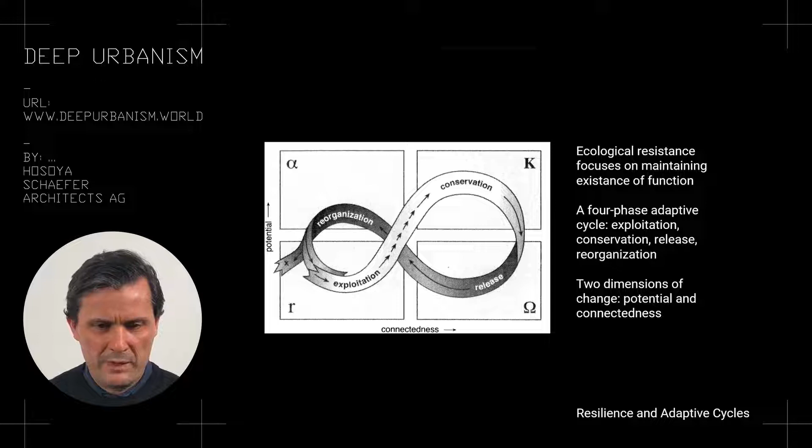again, becomes reorganized in informal ways, so we have a lot of value but not so much connectedness, and then a kind of a new cycle starts again. For me, this is extremely helpful to think about work also in this almost ecological sense. Specifically, when you then imagine that these types of adaptive cycles actually are nested into each other, both in space and in time.

So you have systems which oscillate very quickly, maybe in a daily cycle or in a yearly cycle, embedded in systems which oscillate slowly over hundreds of years, thousands of years. And you have systems on a local scale which are embedded in systems on increasingly larger scales. And they all affect each other.

So for example, it is interesting to imagine that you have systems which are changed by other systems on a smaller scale and a smaller time frame, what is called here revolt. But revolt also could mean planning. It just simply means that you affect a system on a certain scale in space and time with a faster system. So you could argue it's an actual revolution, but you could also argue it's, for example, a project team

working on a project, and with that fast and localized system affecting, for example, a part of a city, which is of course a slower and a bigger system, right? So it doesn't need to be a revolt in terms of revolution. It simply means smaller and faster scale affects a bigger and slower scale.

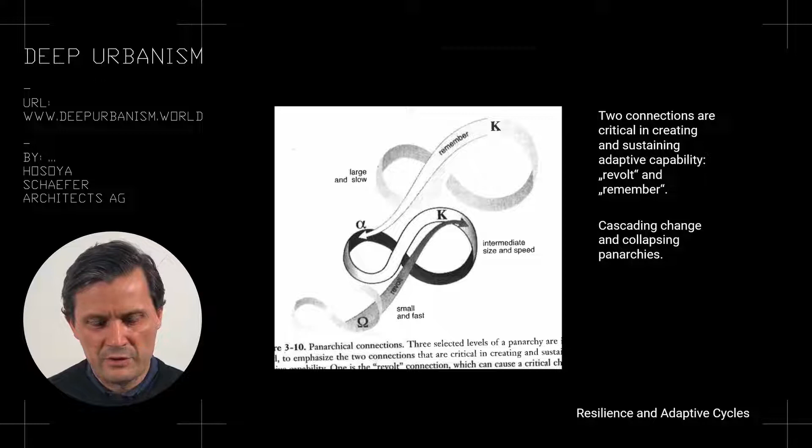But it might also be much easier things. It might be, for example, that a larger scale in a city, for example, infrastructure, is affecting the faster and smaller scale also in the city.

Then the other person which we met, which I find extremely interesting as a thought model, is Polanyi in terms of his idea of the great transformation. So the change from a local embedded culture to a more connected, but inevitably also more abstract culture at the moment when we invented market society. At the moment of scaling of industrialization. And here the term embedded is a kind of a key term for me.

So that means I think all of what we do as architects is kind of spanning between the connected and the embedded. So connected means we are linked to larger scales, also to faster speeds maybe, and at the same time we need to make sure that we don't lose embeddedness, or you could also call it you need to make sure that local life and global access are working hand in hand rather than against each other.

So when I talk about deep moves, what I mean is the idea to keep embeddedness as much as possible, so to keep the connection to the local, to the real, to the people in a particular place intact, with an idea of subsidiarity. So always try to solve on a local scale what you can and only go to a bigger scale when you have to.

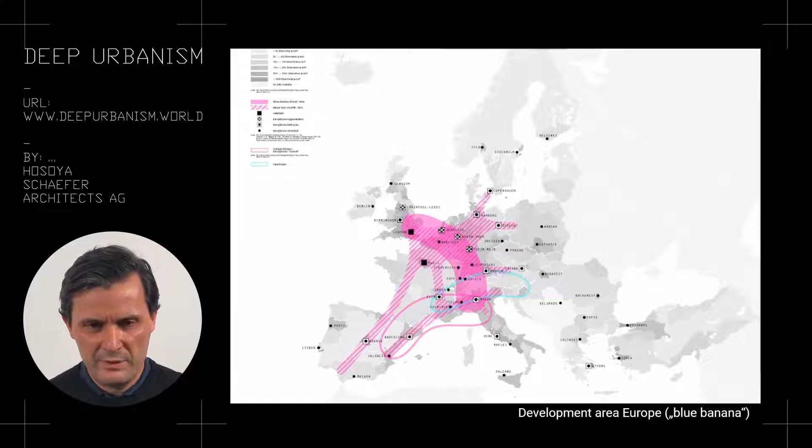And you need to understand both of these factors in order to understand Switzerland. So the very local embeddedness in these rolling green hills, and the connectedness to a kind of a European urban system acting with and into each other. The connectedness to the urban culture is of course important because it gives you also access to European markets, European economy, European culture, and so on.

And therefore, from the very beginning, the question was how these towns and villages and farms can link themselves with infrastructures to these larger systems, so from energy to mobility and so on. And very early on, people started investing in and building these infrastructures, for example, railroads. This particular railroad originally being built by private money because local industrialists wanted to have access to the Gotthard line, so to the north-south axis through Europe.

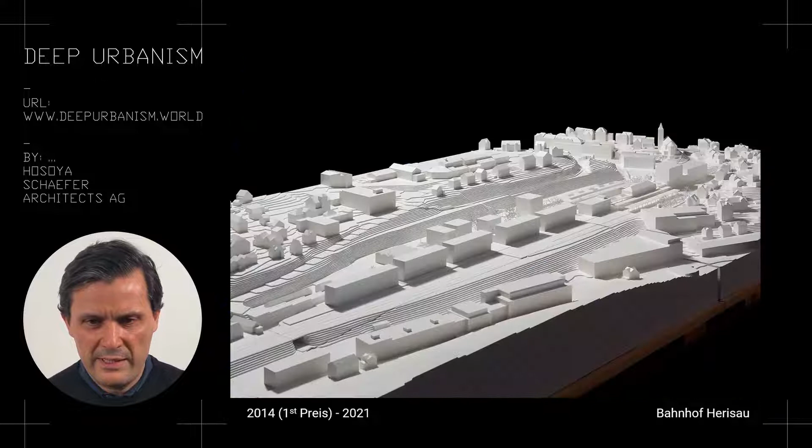So you have these little houses and this infrastructure right next to it. And this is a kind of a first project I want to quickly show you, which is the railroad station of Herisau, where we have the current state shown here in this overview, and here the future state we want to turn this place into, with a kind of a new station area here in the front, but also an area development where by reorganizing the actual station square and the bus stop and so on, we also generate opportunities to add additional buildings and therefore additional urban development on the site.

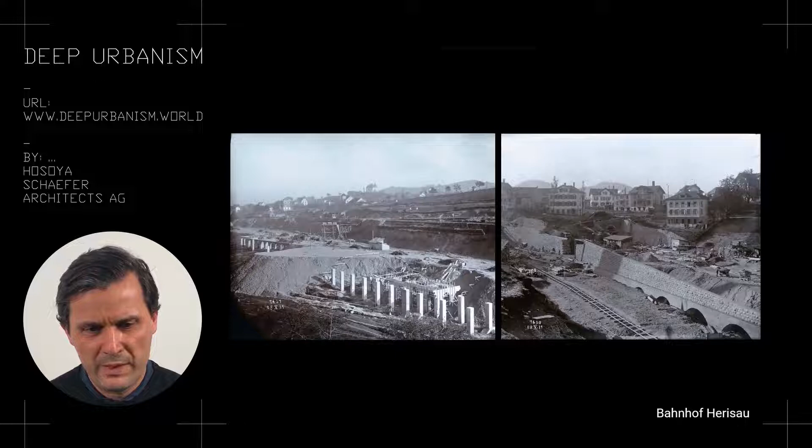But as I said earlier, for the industrialists, mostly invested in textile industry, it was very important to have the link to European markets. So they therefore were interested in having a railroad station which was a through station, which continued further on. And for this, they basically had to lower this track, this single track, add tracks and link through this station over the bridge which we have seen before, through a couple of tunnels to the main axis through Europe. An achievement which they were, of course, incredibly proud of.

So this is in 1910, the opening of this new station and of the tracks which now linked this town in eastern Switzerland to much bigger infrastructures and therefore much bigger markets. But now again, this infrastructure from 1910 has reached its limits, and bus stops have to be organized better.

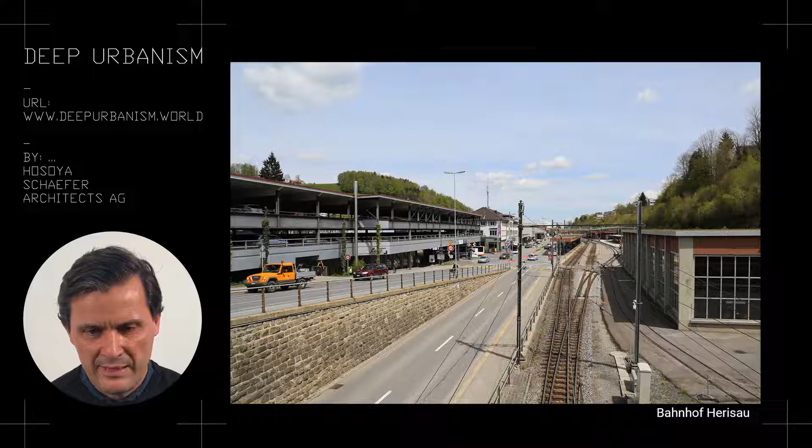The disability access has to be organized better. The entire logistical regime in the station doesn't work so well anymore. So the task was very much to turn this very nice, slightly sleepy station into something new. You see here a bit how it is organized between this cliff, which has been generated by this earlier generation, digging down and laying the tracks on this lower level, flattening out the hill, and therefore ending kind of abruptly before the valley then goes further down.

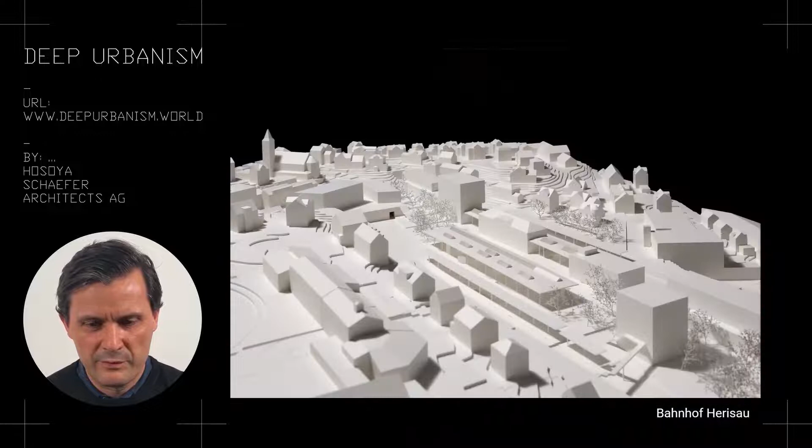This was our competition model from 2014, so quite a long time ago, where we proposed this kind of scheme. We have now developed this scheme further with landscape architects, structural engineers, civil engineers, signaletics and lighting designers into this concept of a kind of a concrete wood hybrid construction, which allows us to make very large spans and generate this much more open, much more clear organization.

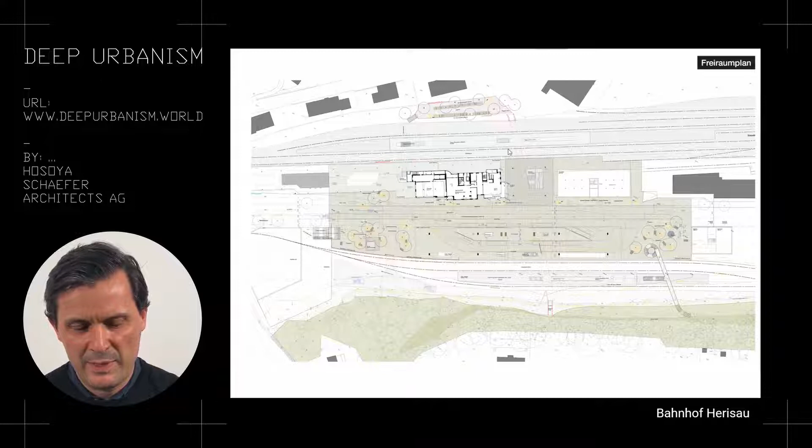Still referring to this old cliff, but organizing it more cleanly so that all the bus stops are now working around this central island, which gives us access to the trains, but also access to the bus, and most importantly links between the two train lines. So this is the train line which basically links the station to the larger system. This train line here is a more local train line. And here you see how this station now becomes reorganized, more clearly orientable and so on. And of course also generating a very strong sense of place with this very large roof.

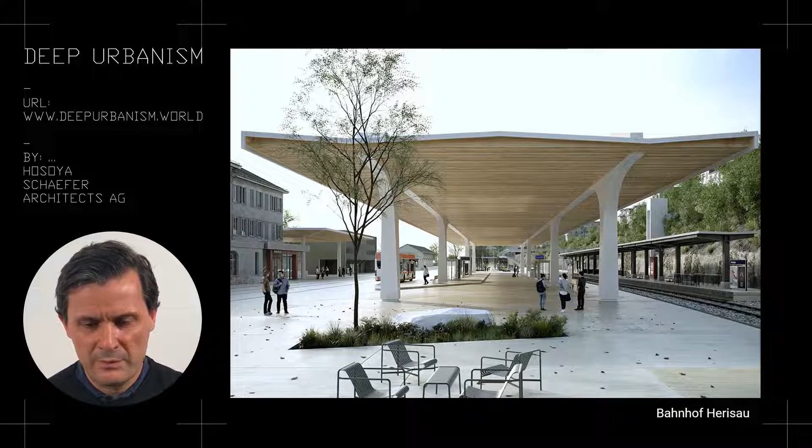So the idea here is to basically improve again the connection the station has to larger infrastructure, but make very sure that while we are doing that, we are actually improving the local embeddedness, we are improving the local situation and the local quality for the people.

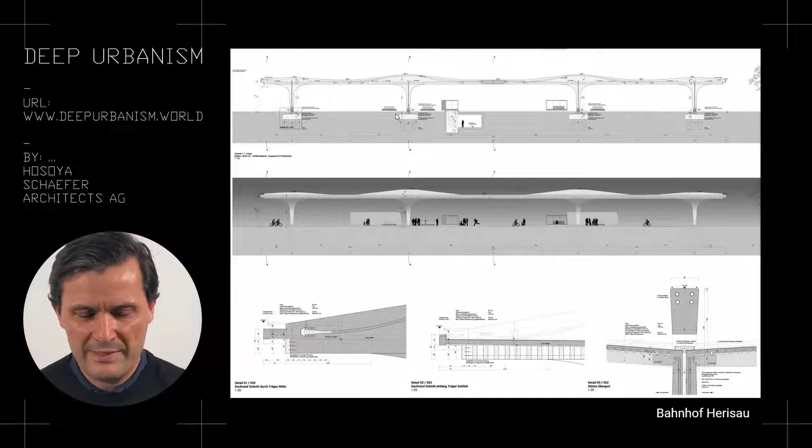So here the engineering portion of it, where we have this concrete wood hybrid structure with a kind of steel cable running here on top the entire length of this 110 meter long roof, in order to allow us this very big span of over 40 meters here in the center. The span had to be this big because there were so many bus stops, which of course have buses on them with doors where people exit and so on. So we needed to absolutely minimize the columns.

You see here a bit what this looks like. So also the idea of adding then lighting, skylights, so that the area underneath the roof is never dark, but always inviting and well lit. And then we are also linking the scale of the station, so from the north-south axis through Europe to the regional train system, to this regional bus stop, to a local site, linking then this local site to the village, so that people also really are able to use this station well,

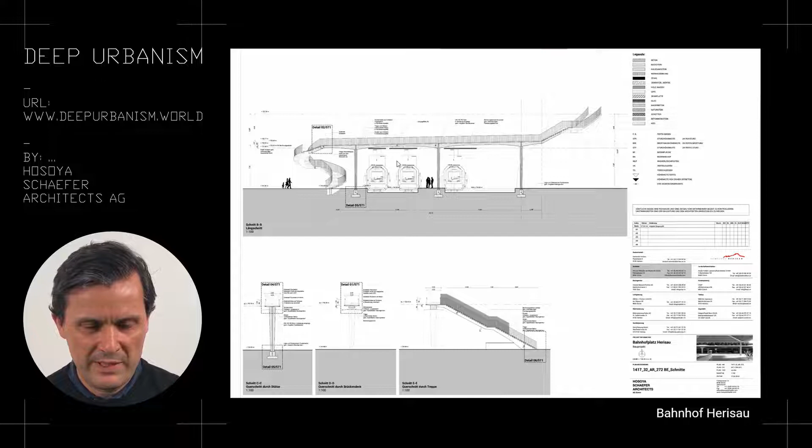with a kind of a very filigrane bridge structure and a kind of a floating spiral staircase without any columns. The beauty of this is that the lower part of the staircase is actually a cantilever linked and embedded in the ground, then linking further up to this point here, which is actually a kind of a pin joint. So here you see the system. And this then is the result, a kind of a station linked both to the world but also to the town, thereby trying to bridge these different scales and at the same time still generating local quality.

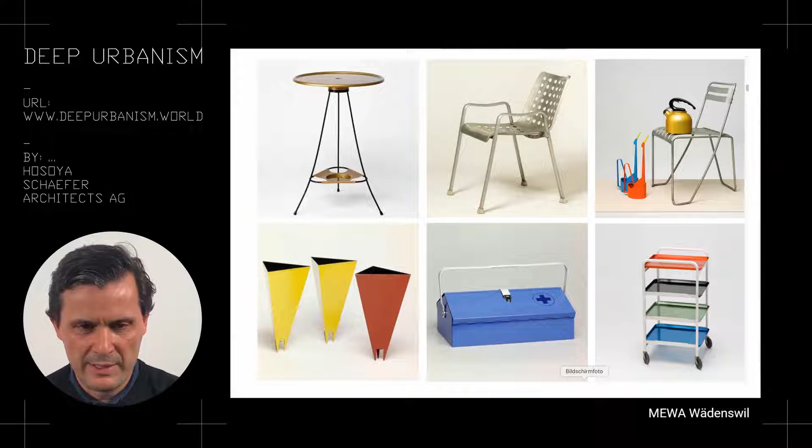Then another project is this project here, which is a former metal factory which produced a lot of the Swiss classics, for example the famous Landi chair, top middle, which does not produce anymore right now. So there are temporary uses now in these industrial halls. So where formerly you had people working, producing these metalworks, it's now a lot more sleepy. You have nature kind of growing in and industry almost completely receding, but still in terms of spaces being very iconic.

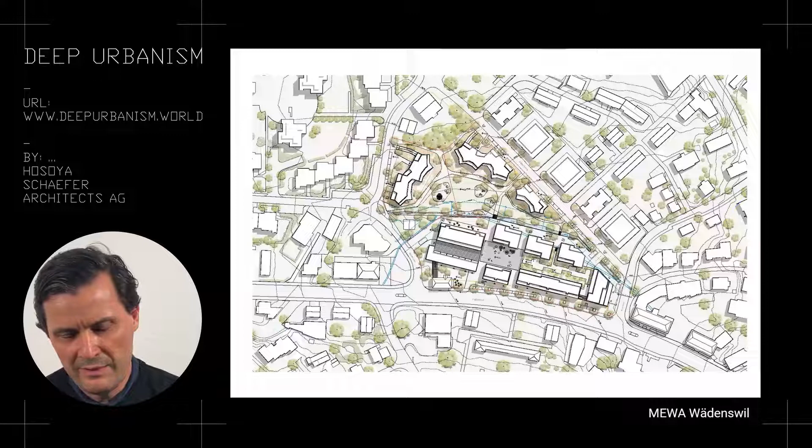And what we were tasked to do in this competition, which we won, was basically to turn this place into 20% still of production and commercial uses and 80% of housing, and do that again in a way where we work with and expand on the established identity, which has a kind of a town part which comes from the industrial site, orthogonally organized, a bit more hard, and also able to incorporate production and commercial functions. So this portion here, and another part which is kind of embedded into this green, more Arcadian portion of the existing situation.

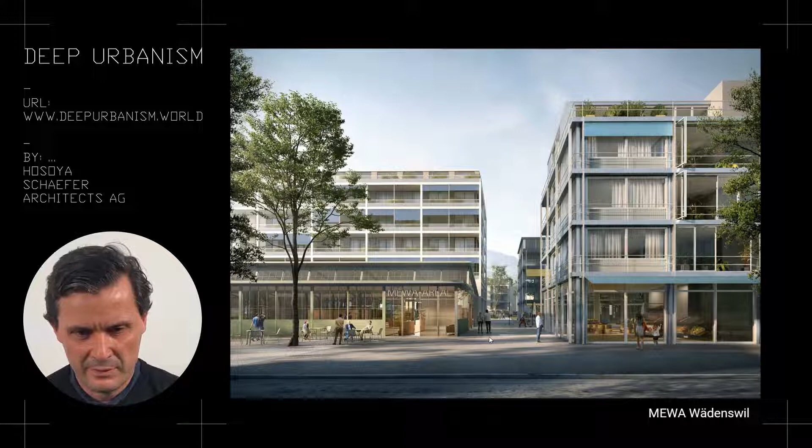So thereby combining the original industrial hall, of which we keep a part, with new areas for retail, commerce and production, and put housing on top around this small square, with a high porosity also from the public street. Again here, the historic hall, which we keep and use for cultural events, for a bit of production still, but also pop-up stores, and the middle part as a kind of a winter garden or as a kind of a foyer for the entire site. And we link that to this green Arcadian park landscape, in which then the other housing parts are located.

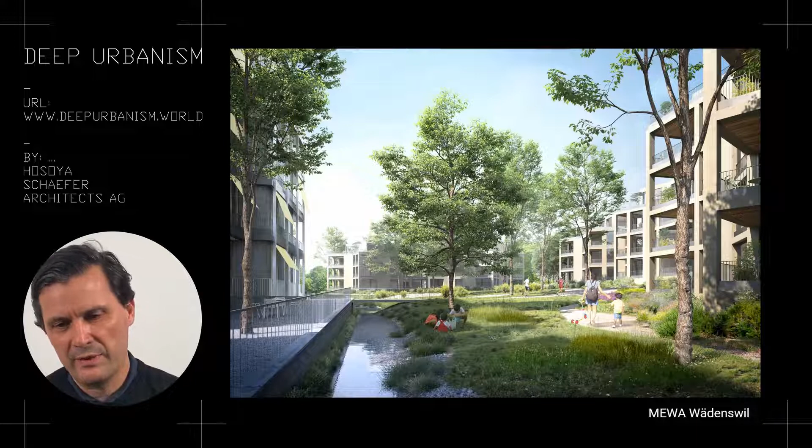So also again here, very much working with the history of the site, trying to extend it, both functionally as well as identity-wise. So never work with tabula rasa, but always keep the historic depth of the site, right? So the first project was about infrastructural depth. This project was now about identity and historical depth.

The same kind of historical depth we were trying to keep also in this competition, which we didn't win. Herzog & de Meuron won it with a project which I don't like so much, but that's the life of an architect. You often lose. But this is originally a kind of a customs terminal in Basel, a logistics center rather.

And the question here was basically to link this logistics center in the south here, which is changing rapidly, becoming more and more mixed use. There's a very nice project by BIG, so by Bjarke Ingels, further to the south, to link this part with this more traditional fabric of the city to the west here, left-hand side of the image.

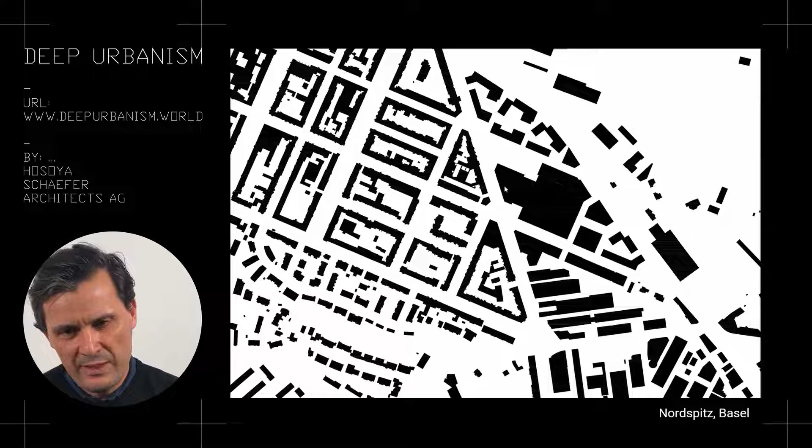There's also a very nice historic cemetery located to the east of our site. You see here also this kind of city grid on the left, and this kind of railroad track logic to the side, to the south, which we had to link together. What we try to do is basically have here this kind of big retail structure which we needed to keep and add to, and embed that into this local condition better, add functions on top of it.

And now here we have this kind of transition element, the kind of perimeter block structure which we take from the existing historic portion and work with it in a way where we still generate all of these niches, but we add more volume to these niches with these high rises, which you will see in a second.

And I think what you will see again and again in the projects which we do is this attempt of nesting spaces from the big idea of this larger kind of neighborhood to the public square which you see here next to this retail space, to these perimeter blocks with their courtyards, to then the loggias of the people living here and so on, right? It's always the idea of nesting.

So again, you see this here, you have the street grid from the historic part coming out, generating here these public spaces, tree covered and very green. And here these smaller perimeter blocks with the green courtyards. Around the green courtyards we have in the front also commercial functions, in the back however housing, oriented always towards the green, towards the inside, because the street in the back is actually quite noisy.

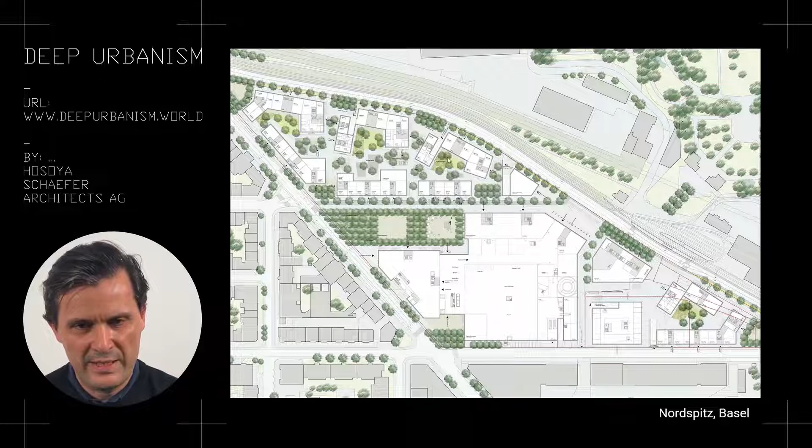organized well. There's always, for example, a threshold from the public space to the more local space, and a threshold then from this communal space to the individual space, for example by this green, then covering and protecting the housing behind it. So here again you see this kind of fractal organization, this kind of nesting of scales into each other. Or here in our model.

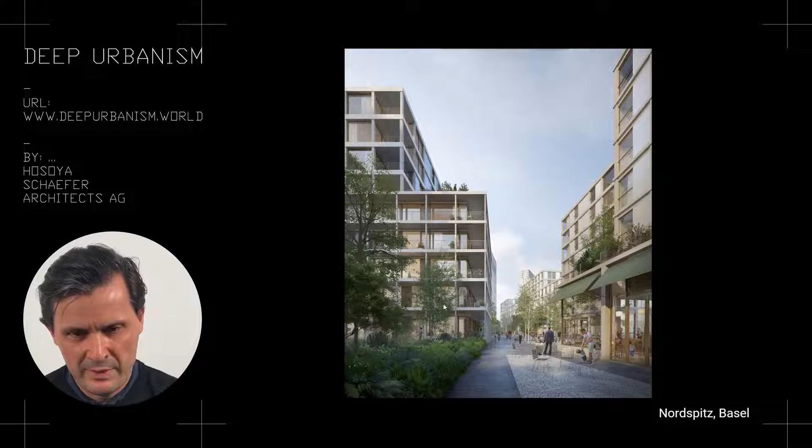And then this is the effect that now we are behind this first row of buildings. We are looking here along this inner axis. So on the right hand side we have the interface between this collective space inside the perimeter block, and then on the other side the public space. And on the left we have then the living areas protected by the green courtyards and by the balcony zone in the plinth area of the buildings.

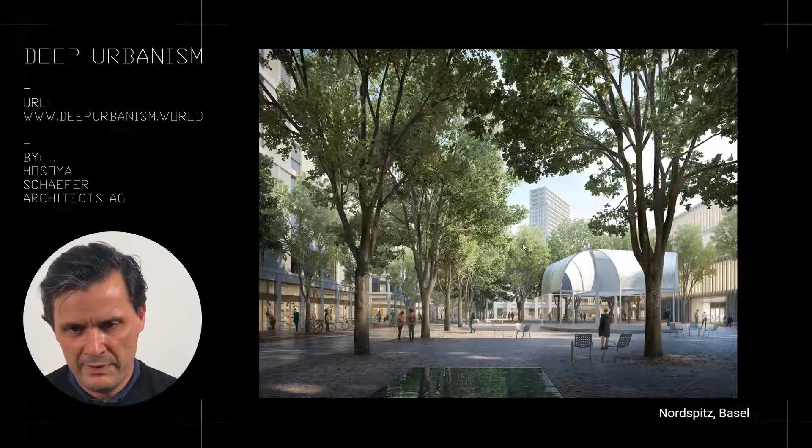This then is the public space. Again, you have the commercial facade on the left, you have a pavilion in the middle, you have the larger retail side on the right, and again this slab tower as a kind of a marker for the entire area.

And then here again we are further out in the system, so this is this larger regional road, again with a tram, louder, and this road then has addresses which are more regional addresses. On the one hand the big high-rise with an office plinth and a housing top, and here the addresses of this large retail company.

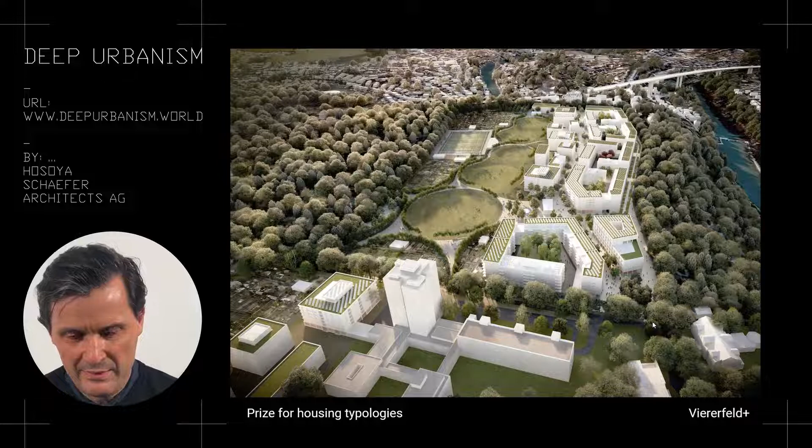Also again this kind of nesting of spaces, addresses on a regional, on a neighborhood, and on a local scale. Same idea here, a competition where we won a portion of, but unfortunately not the master plan. But again here you see this nesting of scales in a project in Bern, where the task was to add here a new neighborhood and a new park.

And the idea we developed was basically to bring this public road, of course, on the one hand along the site, but on the other hand also into the site. So here it would become pedestrian. The reason why we have this gap here is because there's a large tunnel underneath, so we cannot build anything here.

And along this pedestrian line you have on the lower part the perimeter block with the courtyards, and on the upper part a more porous structure which then allows you to link to this public park. And on the other side of the public park you have then these allotment gardens. Again, nesting of spaces, of addresses, of users, so that adding mass always also means adding quality, adding opportunity, adding niches and spaces which actually are worth using.

And then again, zooming in more, so what you see here is basically this portion we took out and developed a bit more for one or two cooperatives. So this is cooperative housing. The idea of this housing is that we have fairly efficient volumes. For example, this point building here.

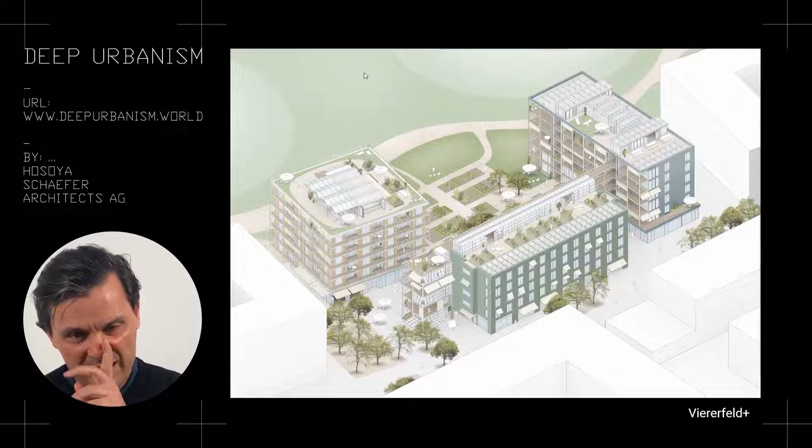All of them are organized around this collective garden space, and that then again sits at this pedestrian alley which you have seen before in the master plan and is connected to the collective green, which is more public towards the upper part here. And this then, the idea what it could look like finally.

Right, so again, a nesting of scales and users and functions from the neighborhood alley to a pocket square or park to a communal staircase where you have functions embedded in it. From that staircase you go to the galleries, and from the galleries you go into your private house. And on the left-hand side again a garden which is in parts shared. Now, so this is the general strategy. So always this nesting of spaces, functions and users.

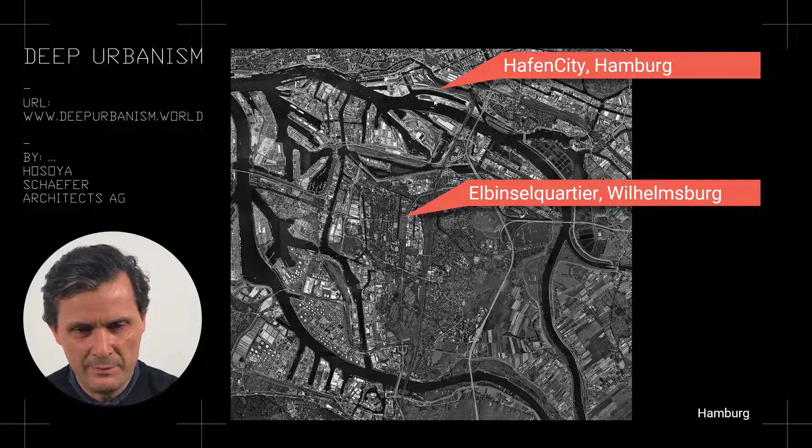And I'm showing you now two larger projects where you can see that you can also do that in entire quarters, not only in area developments. Both of these projects are first prizes which we won in Hamburg. First the HafenCity, and then the Elbinsel quarter here in Wilhelmsburg. Both are located in the estuary of the Elbe River. So this is one river, the Elbe River, which kind of flows around this very large island which is located to the south of the city of Hamburg, which you find here.

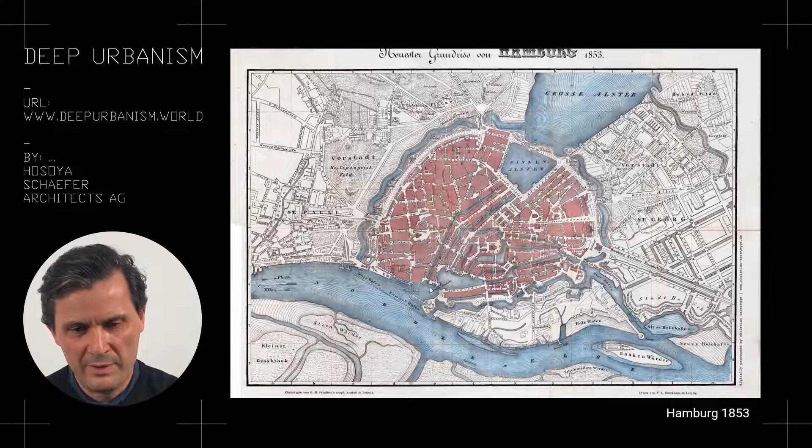And this is basically again a story of a city which is linked here, Hamburg, which is linked into this European urban system. A city which in the mid-19th century was still largely walled, but had already quite a performative, well-functioning harbor organized here still in this smaller portion within the city wall, but slowly growing beyond.

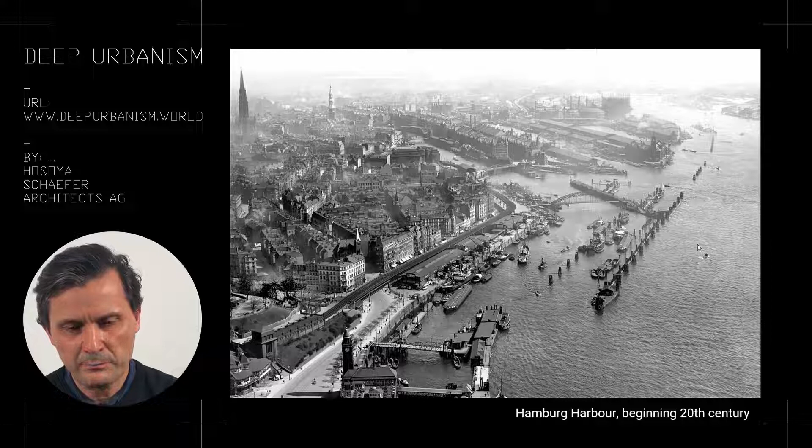And at that time, all of what you see here in the middle of the image was basically a forbidden city outside of the German customs boundary. And this portion here was a very large logistics area and storage area. So all of these buildings here are storage buildings, storing goods which came in from overseas. And you have here, of course, again, the links which are required, for example, railroad links which are required to operate this big harbor.

And then it became clear at the end of the 20th century that the harbor again needed to be bigger, because in the current harbor organization you could not organize the big container shipping which was necessary to be competitive in an increasingly growing global economy.

And at that moment, at the end of the 20th century, in a kind of a fairly secretive operation, the city of Hamburg started planning for this future where the docklands would become available for urban development. They very cleverly bought pieces of land not yet owned by the city, and you have to understand that the city of Hamburg is at the same time also a province, a Bundesland, so they have quite some political power. But they started buying this land.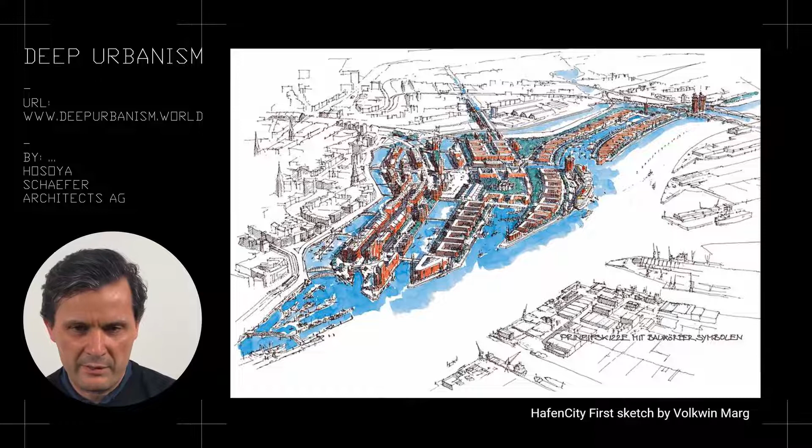And Volkwin Marg, so from Gerkan Marg and Partners, made the very first sketches of what this city could look like. They then made workshops where a lot of international architects were participating, and finally also a competition which was won by KCAP, by Astoc and ASP architects in Germany. Astoc and ASP are German, KCAP was Dutch at that time. And with that, of course, this transformation, which is now globally known as the HafenCity Hamburg, started.

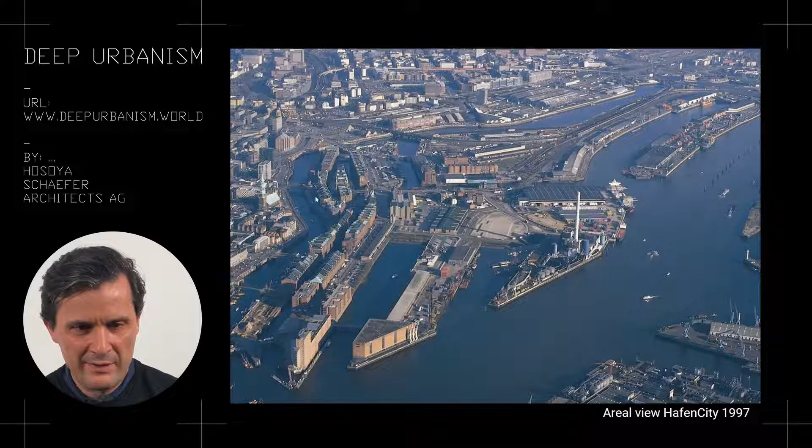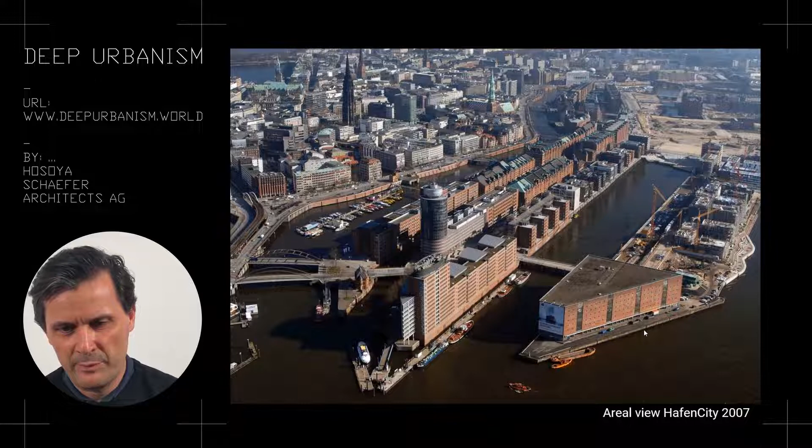Today, this new part of the city of Hamburg is actually frequented very well. It's quite well done. You have people, you have users. And they did a couple of things incredibly cleverly. For example, very early on, they built the metro system. So what you see here is actually a metro station. So the site today looks very different.

And the development tool and company which was basically running the whole thing was the HafenCity GmbH. The HafenCity GmbH is a special purpose vehicle, so it's a company which, however, is fully owned by the city of Hamburg. And that company was able to develop, almost like a private developer, this entire site in a way where they were able to spend money on infrastructure early on, and were then able, step by step, to amortize this very early capital expense, and turn this whole thing into a business case in which the city did not lose any money. So in the end, this whole development basically paid for itself, which is quite an achievement.

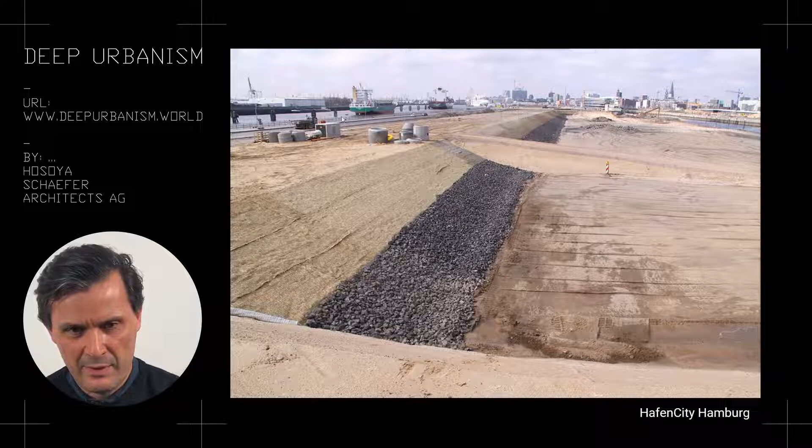And the roads were built so early so that the build-up could sink over several years to the level which the roads finally need. So the whole thing is settling down over many years and compacting itself, so that when you then finally build the roads, they don't move anymore. And of course, at the same time, you don't need to excavate basements when you are already at the right level. And in turn, the roads had to be at this level, 8 meters 45 centimeters above average river level, in order to be protected against high waters, against flooding, specifically also by the ocean pushing water back into the river.

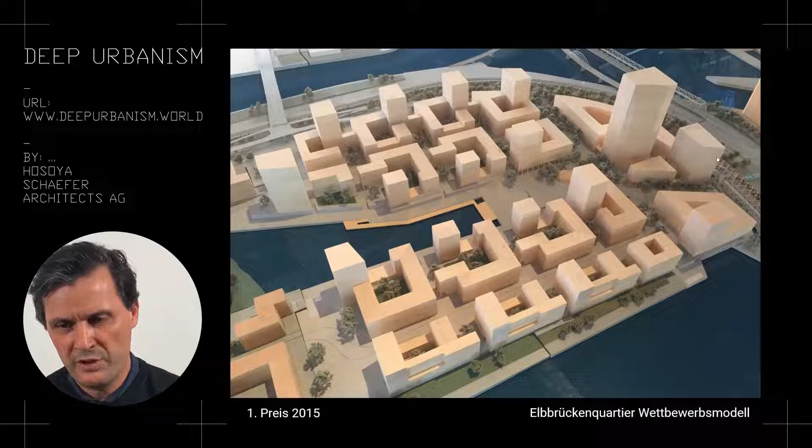And of course, infrastructurally, the entire neighborhood is linked well to the U-Bahn system, here with a station which is above ground. And

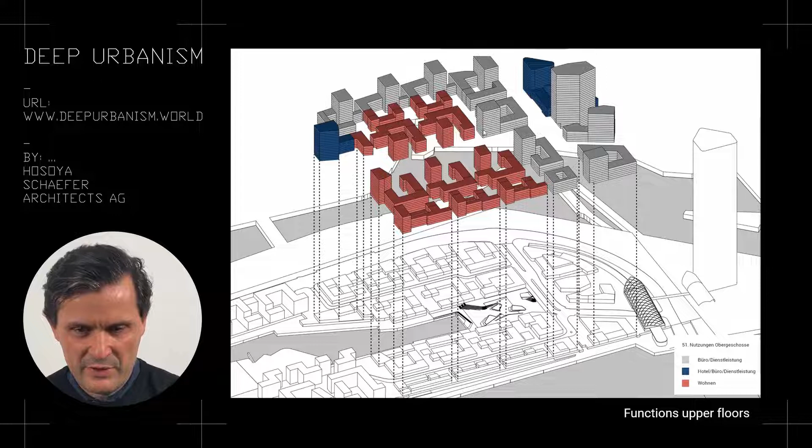Above that you have housing in red, office space in grey, and hotels and commercial functions in blue. And for us it was very important to structure the space with these gates, therefore we also called our scheme the Elb gates, so to speak. You know, where you always move from one scale to the next scale, and therefore our nested system becomes readable.

At the same time, it was also important that we link these scales. So for example, what you see here very faintly is a passage which links the courtyards internally. So the idea would be that if a kid lives here in this courtyard, it can walk through here through a bit of public space and visit a friend who might live in the next courtyard. Right? So this nestedness has to do with generating thresholds, but it also has to do with generating links between these individual compartments, so to speak.

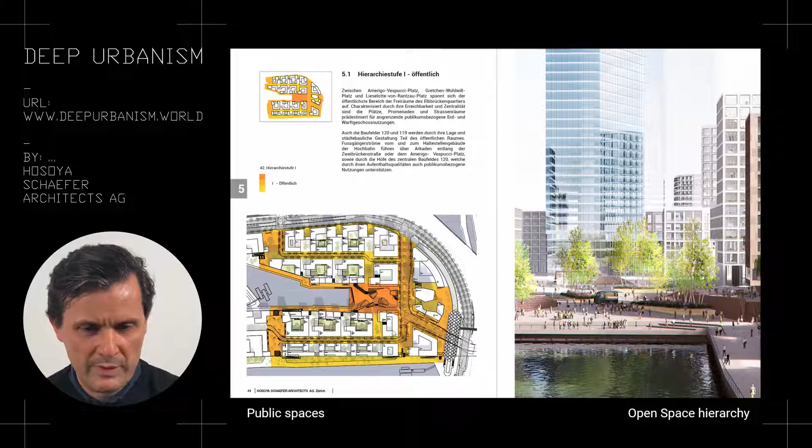And that generates hierarchies of spaces. So from the orange, very public, to the increasingly more local space hierarchy, to in green, even more local, neighborhood level, or then here the courtyard level, which is then really increasingly privatized. Or here in a very early urban design rendering, maybe looking like this, versus a slightly more accessible scale looking like this.

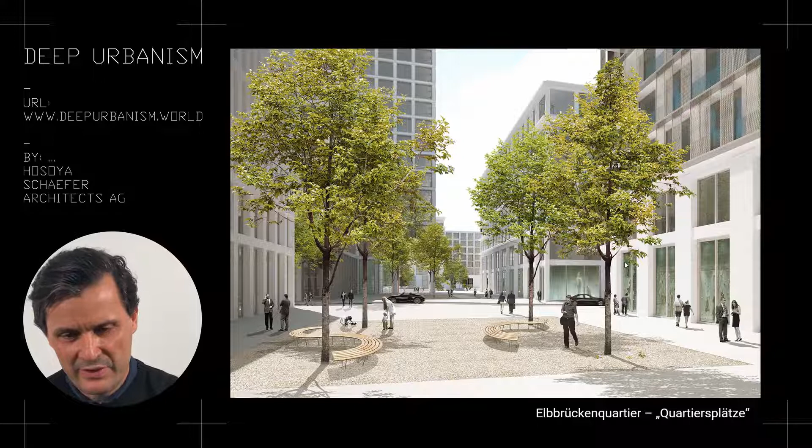And then here, the larger scale of the Amerigo Vespucci Square looking out into the harbor basin. Or the view back where you see the wharfed fronts. So again, there might be moments when this level is flooded. The safe level is actually up here, 8.45 meters. And the Amerigo Vespucci Square is gradually flooded because it's an inclined plane.

And the other thing which was important for us was this almost scenographic organization, like you have in a scenery, in a theater, where back here you have the deep part of the stage, and then you have these buildings forming a series of receding planes, so to speak. And at the very end you have the Elb Tower, which is currently being worked on by Chipperfield, which at some point might look like this.

So basically, this is a 600 million euro project, and is of course the last bit of land sale the city of Hamburg needed in order to pay for the city and its infrastructure, which you see in the front of it. I was in the jury of this competition, which was super interesting because it was a competition where basically the investor was competing, and the investor then had an architect and other planners in his team.

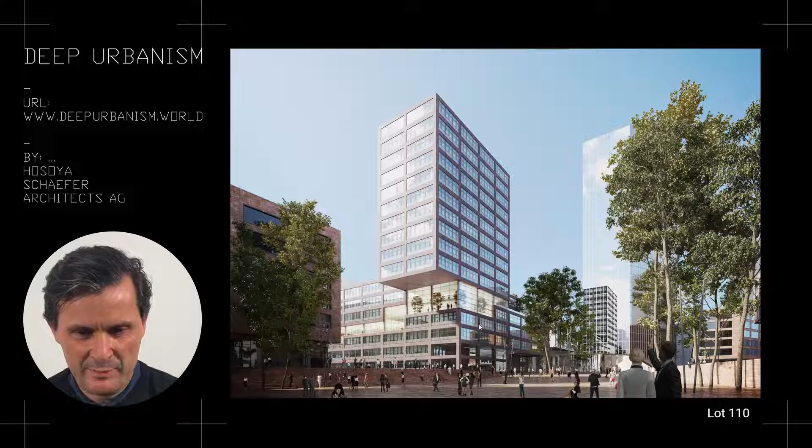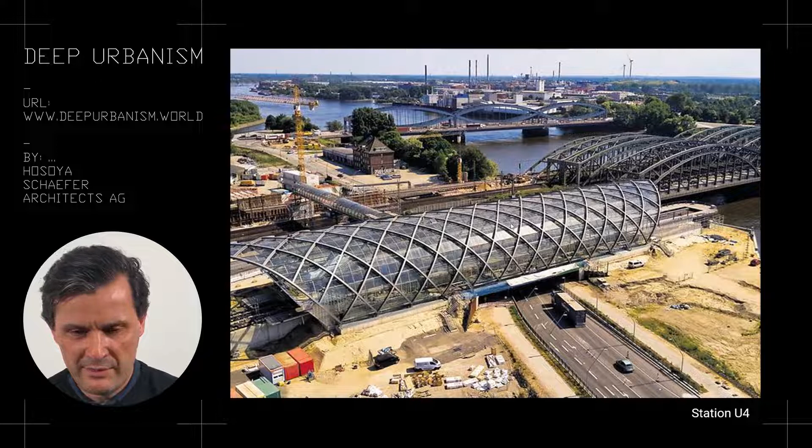But other competitions have also been decided now. So this is done by Gunter Henn, a highly digitalized building, or this is a kind of concrete wood hybrid building, which is this hotel on the western part, so at the end of our site. And also here the station by Gerkan Marg and Partners, by now actually almost finished.

So this is a kind of project on a tabula rasa, where we could really invent everything anew. I mean, the street system in parts was already given, as you have seen, but other than that, we could really create the city from scratch.

And towards the south in Wilhelmsburg, on this Elb Island, which you have seen before, the task was actually extremely different. So here, the site we are working on is actually this entire portion here at the very center of the image. And the site became accessible because this highway, which you see here in the image center, is being moved to the edge of the railroad tracks. And that means this core here can be completely redeveloped.

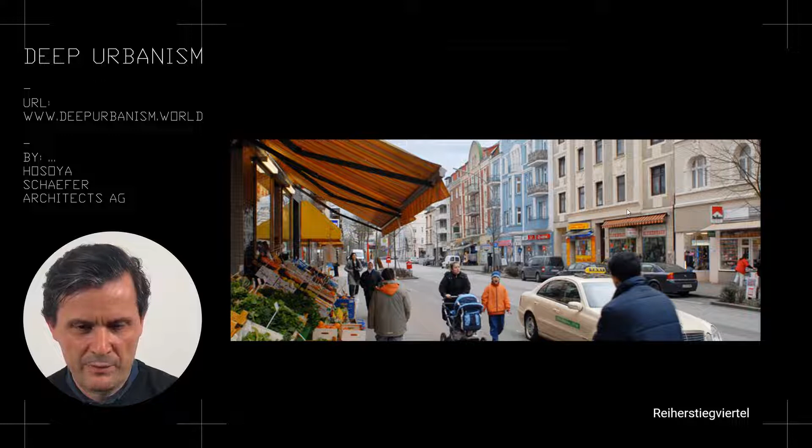The Elbe Island has been flooded in 1962, so urban development actually wasn't so fast because everybody was a bit hesitant about investing in this part of Hamburg. But other parts are actually quite nice, have a fairly colorful, highly mixed, also demographically mixed urban life already. It has landscape parts which are actually fairly beautiful because over time the harbor infrastructure has been grown over with greens and trees and so on.

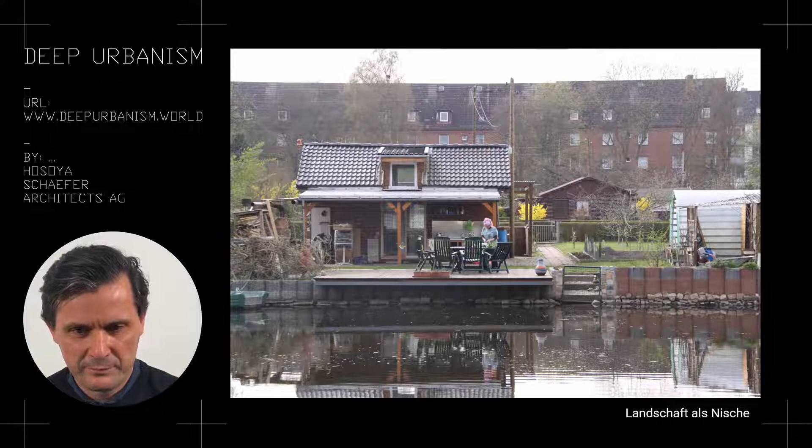It's a place also where allotment gardens allowed a lot of people intimate, fairly happy lives already. So we had to really take care that we could embed ourselves in this existing situation. So what we came up with is basically, again, a kind of a nested system between two canals, which of course were existing, where we are compressing the allotment gardens somewhat, but we need to keep them, where you still see the line of this old highway, almost like the memory of a Roman road

embedded in this neighborhood. And around that, with one new road which we are adding, we are generating now the opportunity of these new, highly differentiated urban blocks, from fairly porous to a bit more intimate, always with these water lines kind of making sure there is drainage on the one hand, but also making sure that there is identity, where the green is really linking together with the urban into something like this, where also the idea was very important that, as we have seen in the existing historic part of Wilhelmsburg, also here we try to generate small units.

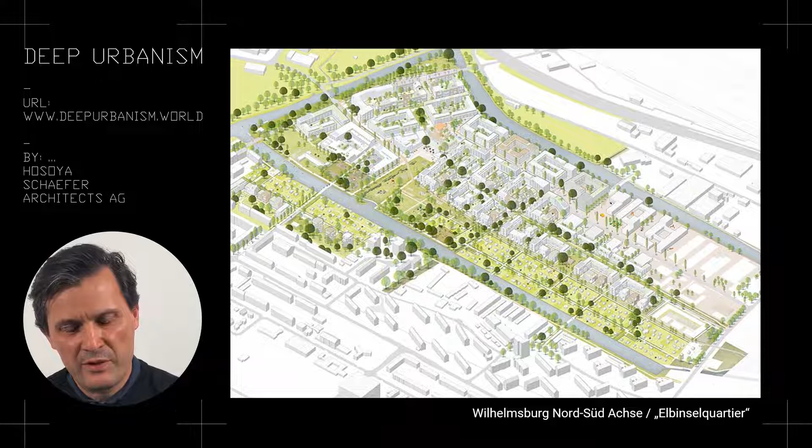So these big blocks we now defined as law have to be developed with a small grain, a grain which is organized around individual staircases, so to speak, so that always the unit of a house is still readable. So what we want to prevent is that in these areas a large developer could just develop this entire block and make everything the same, however well done.

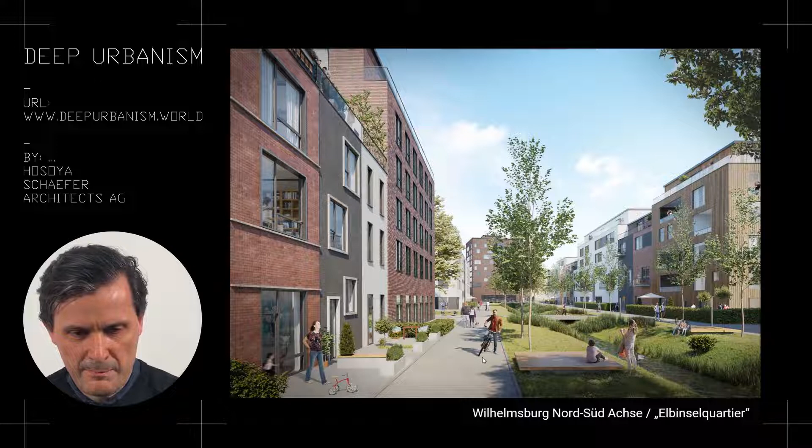We really want to keep here the grain of an individual family's building, for example, like here in these more local addresses, or at least the grain of one house where the people sharing a staircase still know each other. And that's then the effect, that there is quite a bit of diversity around one of these so-called Wettern, so these drainage ditches, always organized again with threshold making, which is fairly precise, so that you can really live also on the ground floor, and a kind of a public green which is accessible to all.

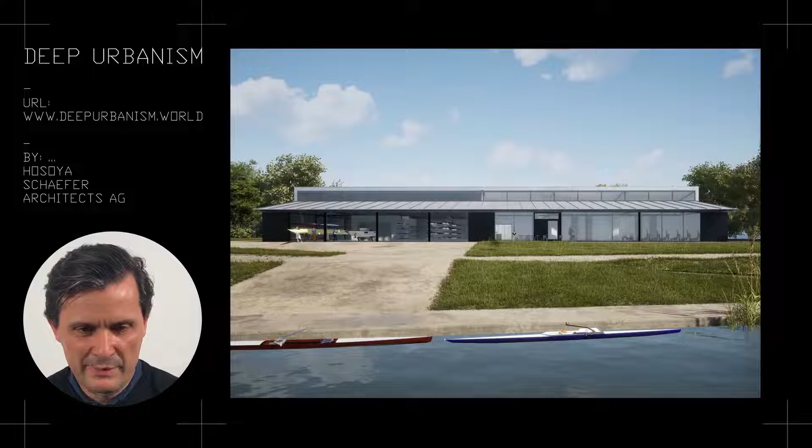Here the view in the other direction. And here, by the way, as a quick aside, we're also building a rowing club, which is great fun. So this is a project of ours, which we are currently working on. A project which is, of course, not anymore in a fairly hidden, intimate green area, but will be surrounded by quite a bit of public and the pressure of a lot of people. So what we're doing is we are making a building which can be completely enclosed. So if it's not used, all of these sliding doors can be pulled together like a turtle, so that the rowing club at times can be quite protected, let's say. For example, when you have a big event.

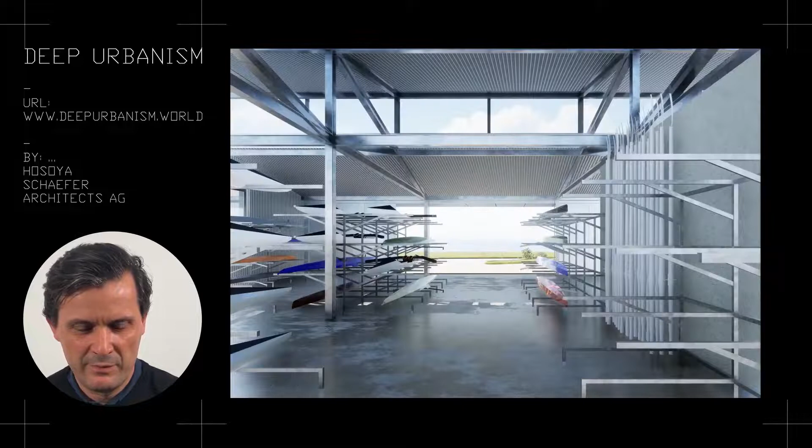This is the interior space with folding doors. And then this is the boathouse looking out into the canal. And I show you a lot of projects to show you similarities in the projects following this larger idea of nesting spaces, the larger idea of subsidiarity, and a careful organization of scales, right? So each project on its own is not the point. The point is the projects together. That's why I'm showing you a lot of them.

This next project is a competition which we didn't win in Hamburg, which is located in one of the more established neighborhoods, which is characterized by very beautiful public parks, but also these traditional facades, again with a kind of a pre-zone, also here carefully done. It's the site of Beiersdorf, which is the company which produces, for example, Nivea, the Nivea cream. They now have a new location and they wanted to develop this site completely new. We were not allowed to keep buildings in this particular case. We actually proposed that, but they didn't want that.

And here we had the task of generating a kind of a large block, which however allows a lot of porosity in the neighborhood, so that what before was enclosed and inaccessible now becomes accessible. Also here we had to add quite a bit of mass in order to make the business case function. So we added high rises, but we proposed the high rises in the middle of the site, so that from the outside you have a transition from this public park, which we have seen before, to a kind of a square, then a couple of steps up to an inner alley, which is however still quite public. At this inner alley we have the plinths of these high rises which have public functions, and then on top of these plinths we have housing functions.

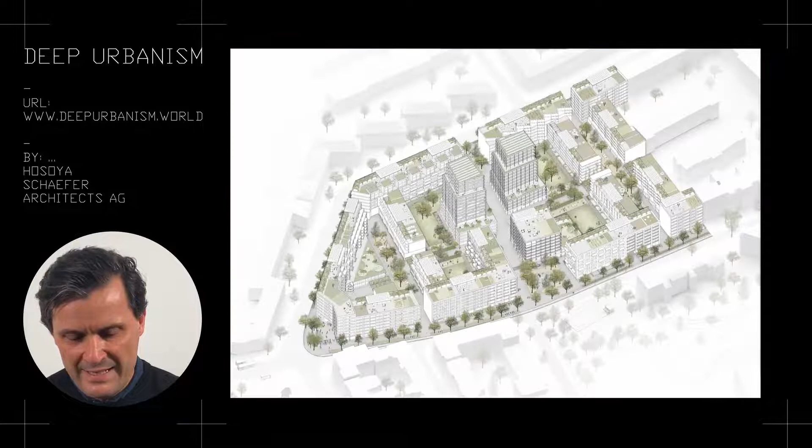Again, this kind of nesting of functions, people, spaces and addresses. Or also here, this kind of inner road, which is less accessible. So what you see here is this road here, with a kindergarten in this part. So kindergarten here, with an outdoor garden on the roof. Again, in spite of the large mass we are adding, there is still porosity, connectivity, and at the same time a sense of neighborhood developing.

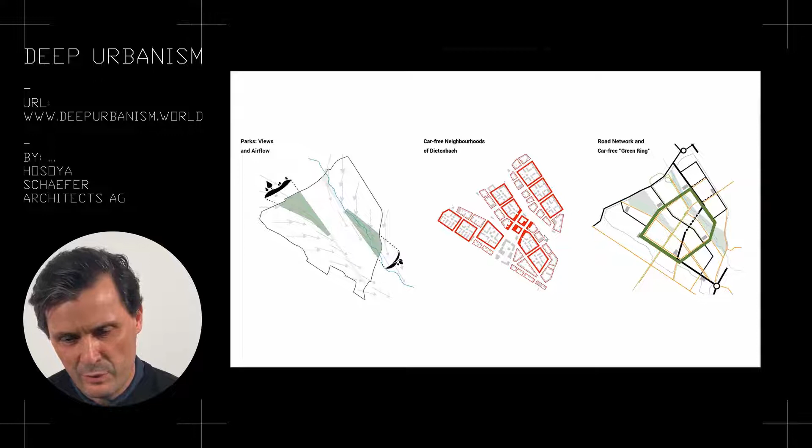Again, a similar project here in Germany, in Freiburg, a large greenfield development where we had to deal with rivers, where we worked with the idea of very large blocks, which you see here with my mouse, with a moment where public uses intensify around a new core, where we are adding this green ring, which is car-free, where you basically move by bike. And in that we are weaving a road network for cars, and are adding a tram line here in the center, which gives you access to a more pedestrian center.

So here you see this overlay of systems, you know, the big blocks, the small blocks, the green ring going around, the tram coming in, accessing it where there are not so many cars, and here the access from the highway with the road system, and all of that not crossing so blatantly, right? So that basically the heavy traffic and pedestrians cross, but they never coincide, right? For example, the green ring has absolutely no car traffic in it, and so on. And that then being the result.

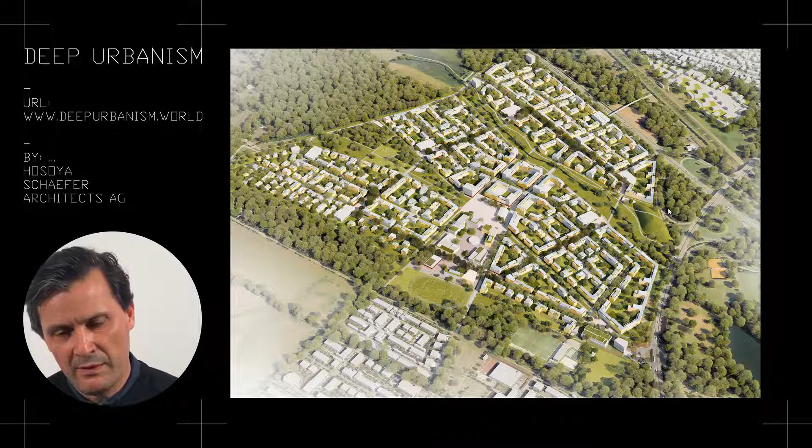So also here a weaving together of green and city, of infrastructural scale with the tram and the local scale of the green ring, and adding the car in a way that it doesn't destroy this local system which we are building.

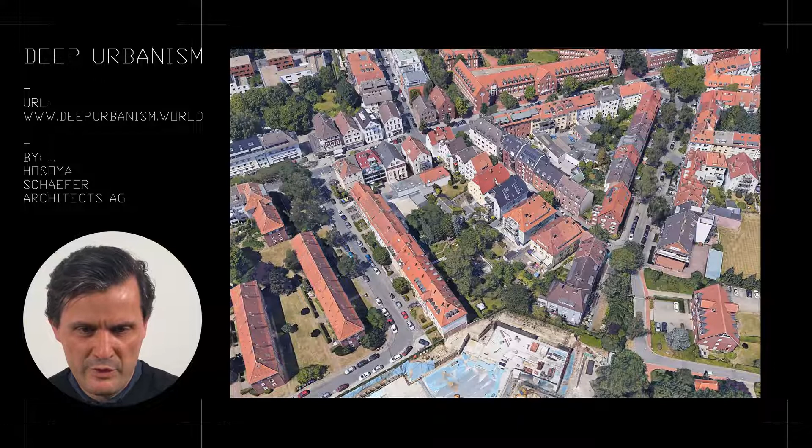Again, a similar project in Münster. Münster is interesting because it has this house logic already built into the historic fabric. Here we were working in the garden of a monastery, which is extremely beautiful. So the idea was to keep all of these trees and green structures and existing buildings and embed them into a new kind of block structure. Again, same thing, nesting of people, users, spaces and addresses.

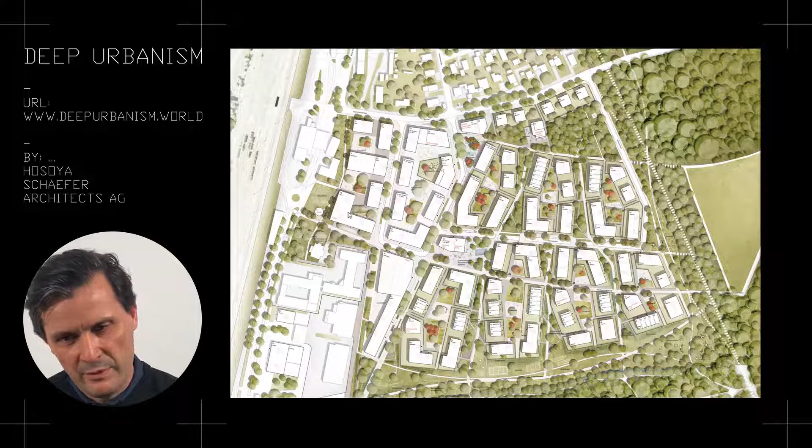Same idea here in Otterbach near Basel, a project which we won, where again you have a similar idea of scaling, which then allows us to really weave together the green and the city, and most importantly allow you to live basically in the forest almost, right?

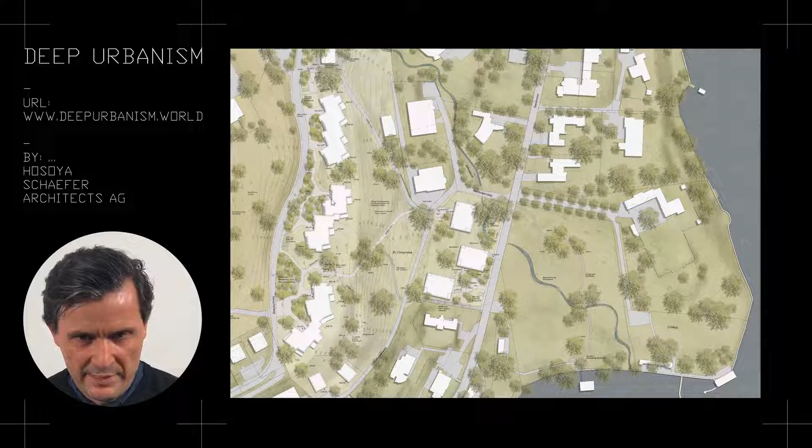And finally, or second finally, a project which is very different, but I show you because we really like it. This is a competition which we submit in a few days actually. I will present it on Monday. It's an extremely beautiful site at the Lake of Lucerne, where again we're trying to embed ourselves into a lower part along the lake road and a slightly higher sequence of buildings along these more local roads.

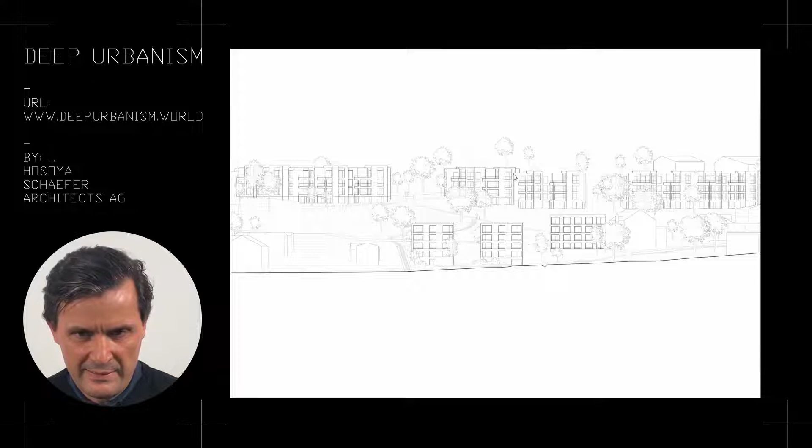So my point being, even on the level of an apartment, we are working with the same ideas, right? Nesting, threshold, and organizing of spaces, people, and functions in a fractal manner. So here these buildings on the site as silhouettes, differentiated here also by a building which is one large object, but at the same time we are differentiating it in section slightly to break the scale, and most importantly we differentiate it also in terms of facade making, so that we break the scale of this large object and are able to hide it in the landscape.

Here the more cost-effective rental apartments. So these are apartments you buy, these are apartments you rent. And then again, through these private houses, where basically all the outdoor spaces of the houses are always in the building volume, right? There are no gardens. We are not occupying the park level with private functions.

So there are no sun umbrellas, hedges, you know, this entire trash of suburban life. We don't have that. So people are in the volume, like living in this rock, because the idea is these are like rocks being left by some glacier on this green hill. So people are living here.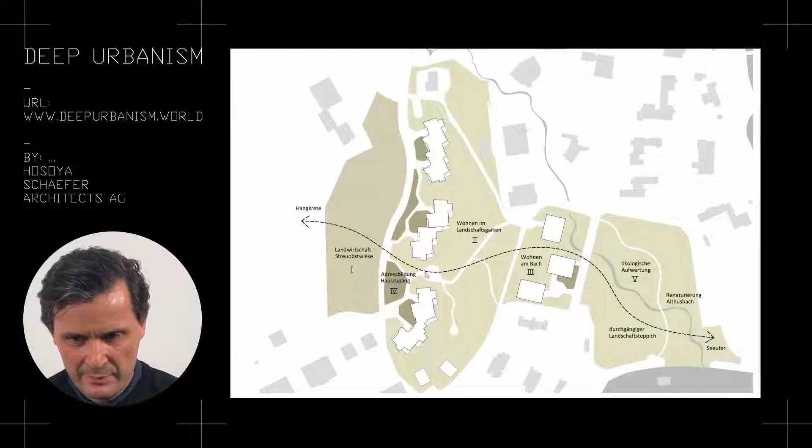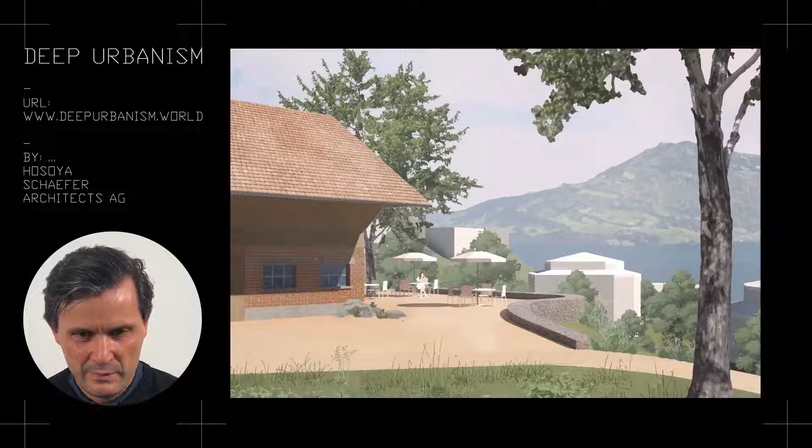And for the public, so for the village public, we are generating connections by having this park landscape going through from the hill to the lake, with this path connecting everything together, giving people access from this existing boathouse, historic boathouse at the lake, to a communal part organized around this barn,

to looking out from your house, to a kind of a public lookout spot which gives you access to the hill view, or a more intimate resting spot, also giving access to this park and the hill view.

Right, it's the weaving together of a private occupation of the land with these apartments which are bought by people, but these people, they don't live on the park, they live next to the park, and the park is given to the public. In the end, then generating an idea like this.

And even in the center of Zurich, in a location right here, the same idea again, you know, the idea of generating a clear facade to the public streets, which is a bit unusual, but it's still well behaved. So basically these volumes here, due to the Zurich building law, only 20% of the facade can protrude.

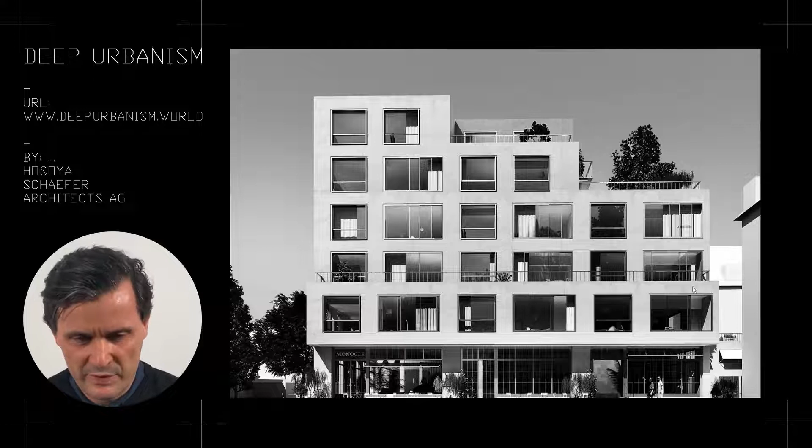Here we have the main intersection where we are high, and we are stepping down and we are attaching ourselves to the local scale. And then the other side is participating in the courtyard of this perimeter block, where all of these staircases and so on give you an additional access to your apartment.

So you can exit your apartment on the one hand by an elevator, which is hidden in here, and a staircase. But you can also always use the external staircase, which again links everybody. So also here, linking the public and the private in a way that a kind of a collective added value is being generated.

But embedding is not only something you do with buildings, you embed projects also with processes. And this is the last project I'm going to show you. Embedding with processes, we did here with a participatory process quite extremely in this location, which is at the very center of Zurich. So this is the main station in Zurich. This is the rail yard,

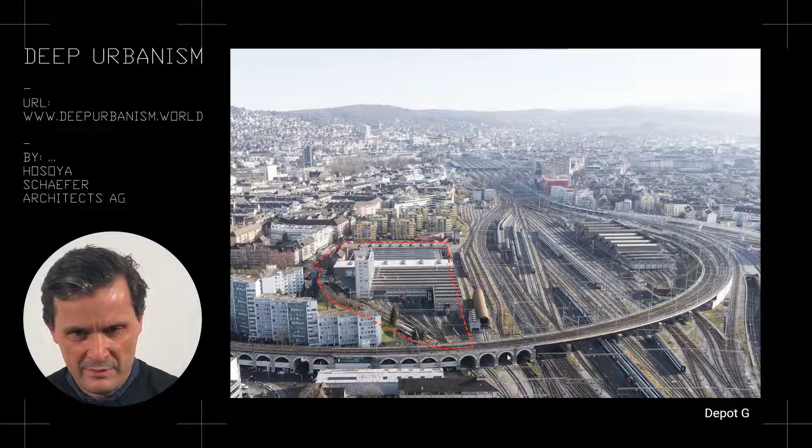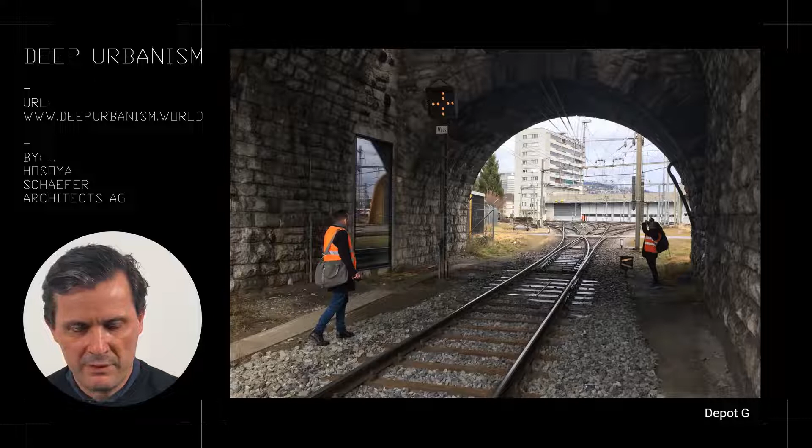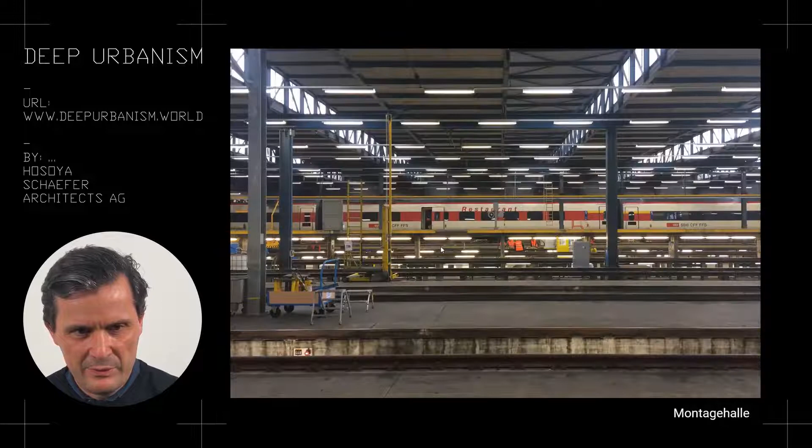There are historic protection issues. So, for example, we need to keep this building here. We need to keep part of this building here. So here you see how it's used today. We also need to keep this building, which basically generates the main address to the neighborhood.

And this neighborhood is very well used because it's extremely central. It has a very beautiful park right next to our site, the so-called Josef-Wiese, the Josef Meadow. And it's a site which is very politically charged because the people who live here, they have a very good neighborhood life. They also fought for this life.

So this square here in the 1980s was actually planned to be a highway access to the city of Zurich. So people organized against it, and now they have this actually very beautiful square which is frequently used, for example for summer festivals. So you couldn't just do a plan and then think it can be implemented easily. We had to do some participation for two reasons.

On the one hand, to politically legitimate the development, but on the other hand also to hear what the people have to say, to prevent the kind of a top-down modernist way of planning, but make something which is embedded not only in terms of built volumes, addresses and spaces as we have seen before, but it's embedded also in the minds of the people through their ideas and through their participation.

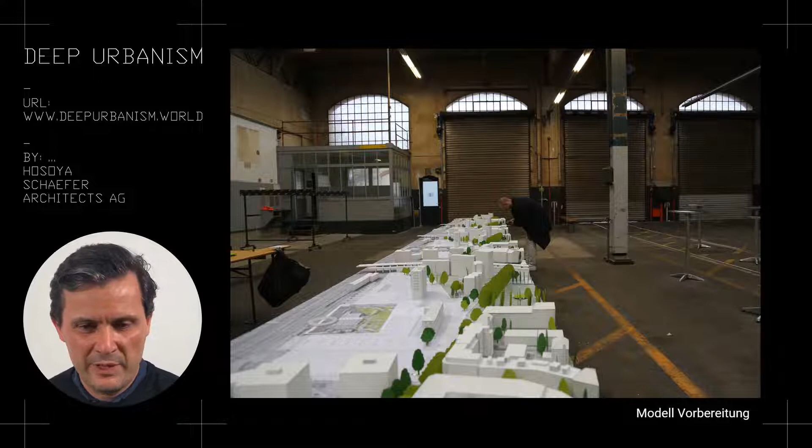Every group which was coming to participate got one site model which we prepared in the office, which was actually a gigantic amount of work, was a bit insane to do. These models we then discussed and had workshops on with large groups of people. We did this with 4 groups a day for 2 days total. So we had a total of 8 groups organized in 2 days who had model parts.

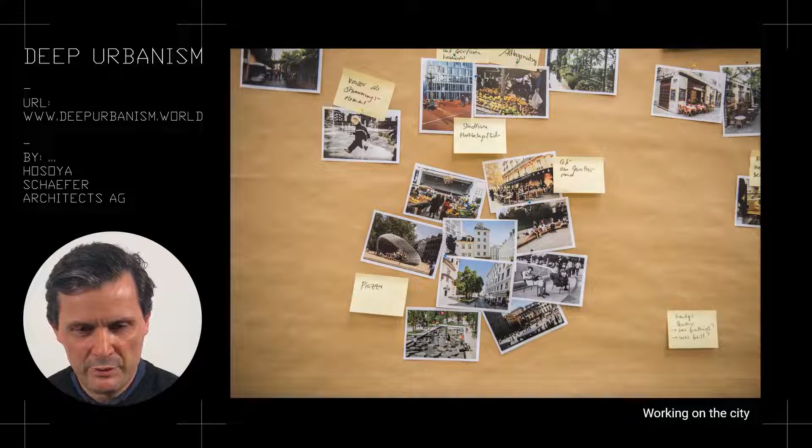They had a board where they could collect ideas. They had mood postcards from us to express ideas more effectively. And we then started to produce typologies with them. Of course, everybody wanted to make green high-rises, but it was kind of fun.

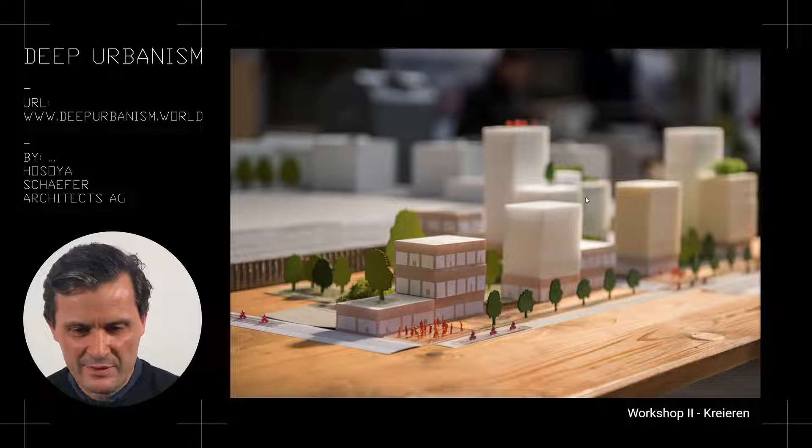These first type ideas we then placed together into ensembles, into groups of buildings, which we made really beautiful. And even the urban planner of Zurich was very happy to photograph it. And we then placed it together. So this is all work of one day with a group of amateurs, so to speak.

Brutally just telling them, look, you have one day to produce an idea, and they all succeeded. And it was interesting to see what people had in their mind. So this is the idea of a Riviera along the railroad tracks, a public promenade, slightly raised, with water, with green. And then you have an alley system, and in this alley system you might even have high-rises.

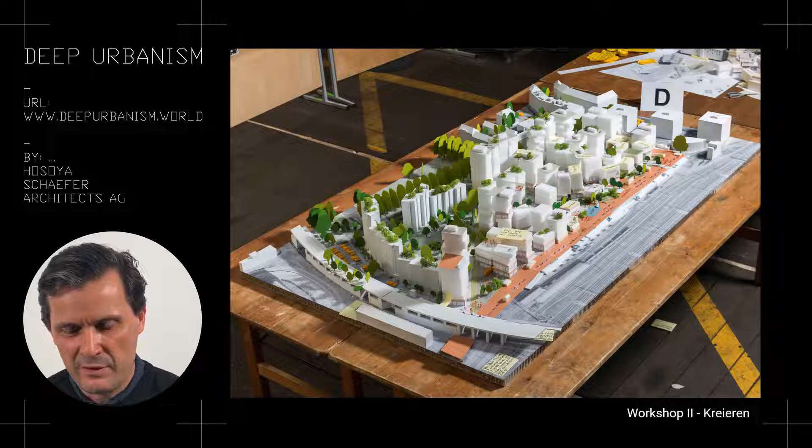So people are not afraid of height, they're not afraid of density, but people are afraid of anonymity and ghettoization and a certain urban brutality. And of course they're right to be afraid of that, they're right to not want that.

So this is the second team where we had high-rises with waterfalls, where we had an embedding also of the existing historic quarters, where we had a very large building. We had an idea of fairly well-organized urban blocks. So one here, a second one, very large one here, incorporating also the existing buildings. We had the idea of really embedding buildings also in the existing halls.

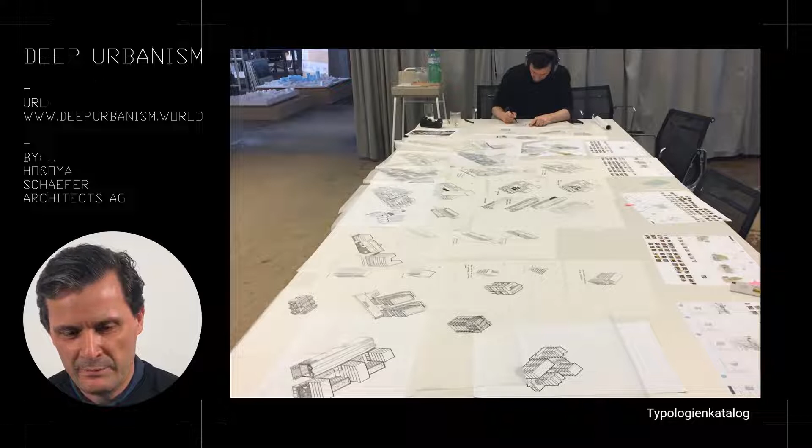We have the very green courtyard, again a kind of a nesting of spaces, now not invented by us, but by the people. We have the historic train lines still visible in the public space as traces and memories. We then turned this into preliminary building law. This is a kind of a master plan where we have fairly abstract building sites, and here what we call situations. So for example, the situation at the tracks, right?

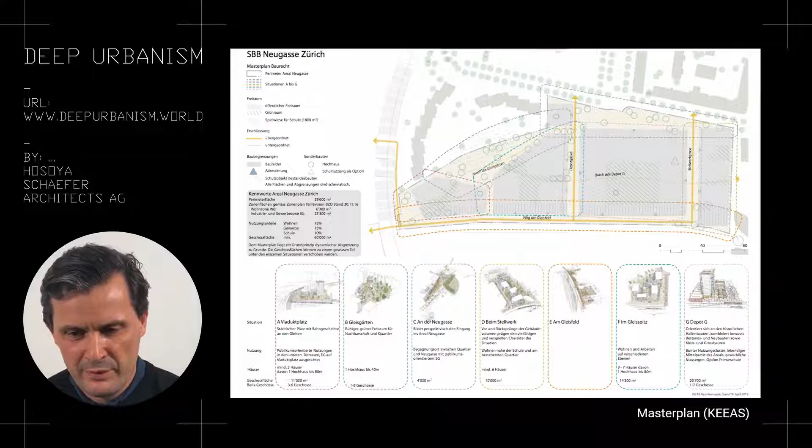It's kind of a building law with a narrative component, trying to keep the ideas and the narratives of the people intact, and in the end, ending up with a kind of illustration of these situations which we invented together as a kind of a memory which is then embedded in the final urban design, which of course still needs to be planned.

So the message here is that embedding also means embedding it into these active agents of urban change, which we of course have gotten to know in the lecture Deep Cognition, right? Every single person is an embodied mind with a past and a future. And of course what we need to do is to keep this organicness, to keep this ability to carry something from the past into the future, to keep this intact while we plan.

So embedding is not only in time, lecture 1, it is not only in space, lecture 2, but it is also very much in this collective, emerging, co-evolving, embodied mind which we are all sharing. So this is the first of the 3 applied lectures, and I hope it made sense. And I'm happy to answer questions.